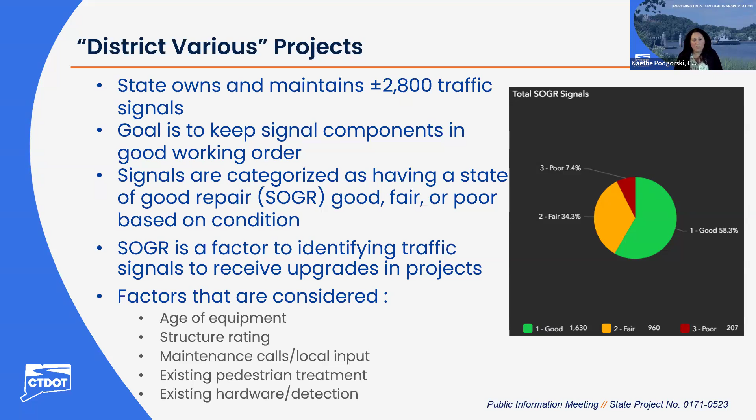So the formal purpose and need for the project is to replace aging signal infrastructure with new signal equipment to achieve a state of good repair.

So some of the improvements that could be expected at these locations are new equipment at the full replacement locations, pedestrian upgrades, potential flashing yellow arrows - that's for permissive left turn movements if there's a dedicated left turn lane. Those have been installed in recent years, and they're getting installed more throughout the state. New vehicle detection, we'll go into that a little bit more. Improved access and potentially amenities at transit stops that are nearby to these intersections, and then illumination of crosswalks and transit stops that are on state roads.

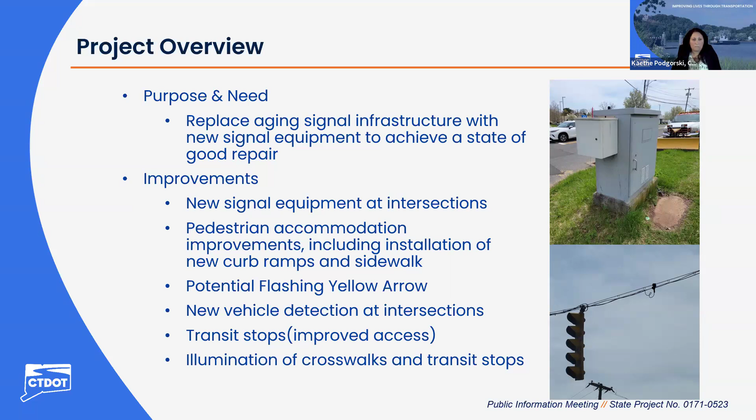So when I talk about bringing traffic signal equipment up to current standards, I wanted to give a little more information on that. We try to use mast arms now as our preferred signal support structure in the state. We have a picture of a typical mast arm used in a project like this on the bottom right. You can see signal heads, the green, yellow, red indications attached to the mast arm, with reflectorized backplates to help with their visibility.

Vehicle detection, I still have another slide to go into more detail about that. Controllers, so each traffic signal has a gray cabinet in its proximity, and when you open it up, you see all of this hardware and wiring in the top right. There's a lot of technology that goes into operating traffic signals and having them communicate with each other, so it can get outdated very quickly. Bringing it up to the latest standard can really help with communications and operation.

And then emergency preemption. That is equipment that can enable safer passage of large emergency response vehicles, such as fire trucks, that have a hard time stopping quickly at a red light because they're so big and heavy. This equipment can identify when these trucks are approaching a traffic signal, and it can hold a green phase so that the vehicle can go through and respond to the emergency a little quicker.

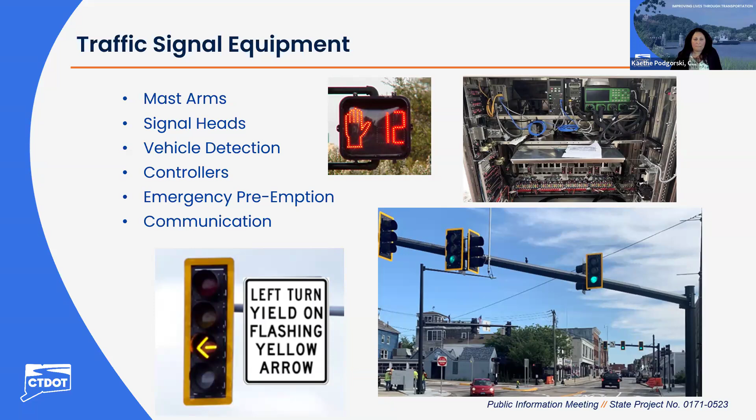So a little bit more information on pedestrian accommodations. Sometimes these are the most noticeable improvements that people see when we come through and do these projects, so I wanted to highlight some of them.

We are trying to make more accommodations for pedestrians and transit users. We're making an effort to install additional crosswalks if there are none, or improve existing crosswalks if they exist already. With that, we're installing new ADA compliant curb ramps, and trying to make sidewalk connections. If there are dead-ended sections of sidewalk, we try to connect them so that pedestrians are able to travel to the intersection and through the intersection a little bit easier.

And then adding pedestrian push signal heads, the walker and the flashing hand, and push buttons for pedestrians to call the phasing for them to cross. What's kind of a new thing in the state is the use of blank out signs, used to draw attention to potential conflicts between right turning vehicles and pedestrians. You can see on this video the loop of how it works and how it cycles through the different messages when peds are walking or stopped. So those are some of the pedestrian improvements that you can expect to see.

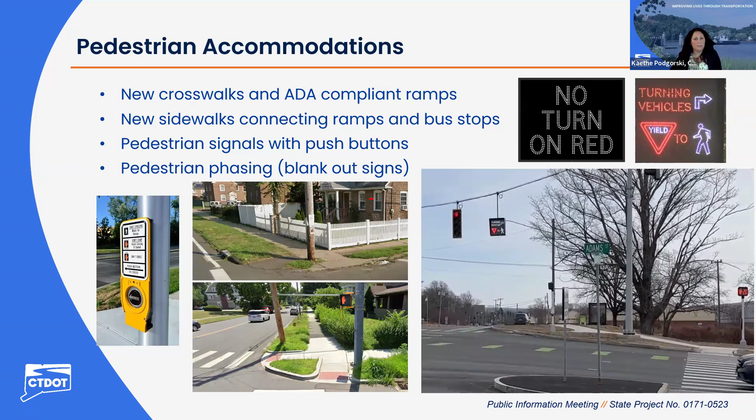And then here's the vehicle detection slide. One of the most typical vehicle detection equipment pieces we use is a 360-degree camera that captures detection zones located right at the stop bar, right at the intersection. You can see this bell camera attached to the mast arm in the photo. You probably see a lot of these around the state, they're very common now. The view from that fisheye camera is shown in the bottom right of the slide, and all the detection zones are where we're interested to know if vehicles are there or not, if they've traveled through or if they're waiting during their red light phase. It helps the signal controller know which phases to call, like a left turn phase could be called if there's a car there, or skipped if there's no car there. It helps the signal operate more efficiently, particularly during the day when there's more traffic, and it also helps it operate more safely at nighttime.

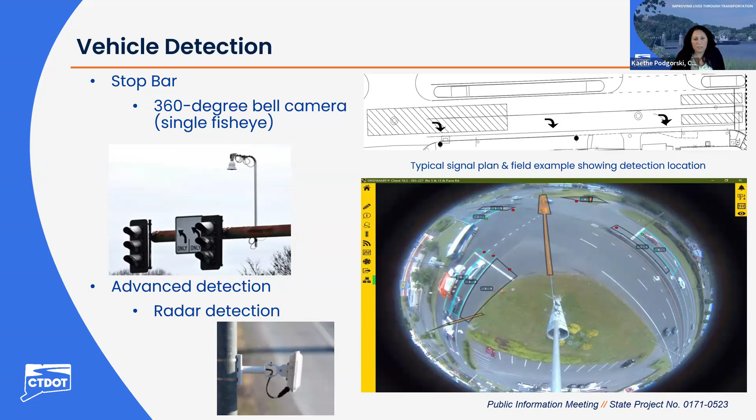The radar detection in the bottom, that white rectangular picture, is used for detection on high-speed approaches as vehicles are approaching the signals. Sometimes it's difficult for drivers to decide whether they should stop as the light is changing from yellow to red, or if they should go through because they're going too quickly to stop. These types of detectors let the controller know there's a vehicle approaching, and they can extend the green phase a little bit if it seems like it's going too fast to stop in time. So you'll see those on high-speed approaches throughout the state.

So that's the overview of the traffic signal equipment and the traffic signal replacement program. Now we're going to get into this specific District 1 project, and I'm going to hand it over to Leo, who will go through all of the individual locations.

Thank you, Kaethe. So as mentioned, my name is Leo Gamez. I am a traffic engineer at CTDOT, and I'll be going through first the various full replacement locations and then the partial replacement locations.

So first here in Enfield, we have one full replacement location. It's on US Route 5, Enfield Street at Parker Street. I just want to introduce here the legend that will be remaining constant throughout all of the images you see of the plans. You'll see that we'll have these blue shapes that'll be proposed easements.

Malcolm Thomas will be talking a little bit more about easements and rights of way later on in this presentation. The green shapes will be new ramps or sidewalks. As part of this project, we're doing various pedestrian improvements, so that'll be in green. Crosswalks will be in purple, shown with little dot icons. Mast arm signal supports, where the foundation is, will be a square instead of a circle, in orange. Signal heads will be a triangle attached to this mast arm.

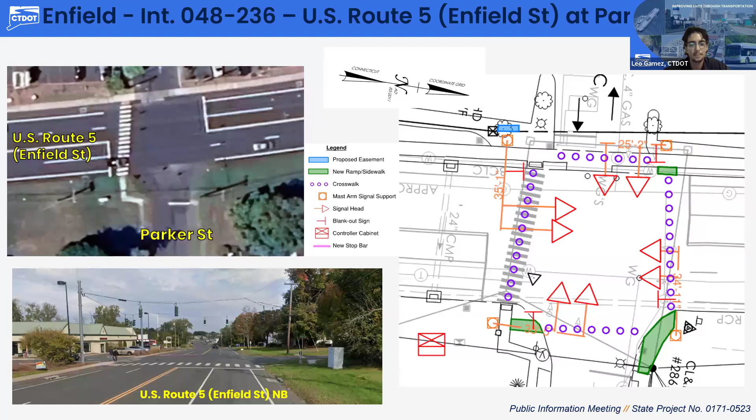So in Hartford, we have 6 locations that are receiving full replacement upgrades along this corridor. So starting here on Route 187, which is Blue Hills Avenue at Westbourne Parkway.

Starting at the southwest corner, we have a 35-foot mast arm. Again, we'll be obtaining some easements here for installation.

On the northwest corner, we have a 35-foot mast arm as well. On the northeast corner, we have a 30-foot mast arm. And on the southeast corner, we have a 30-foot mast arm. We'll be maintaining the 4 crosswalks that are present here at this intersection, as well as doing some upgrades to the sidewalk ramps.

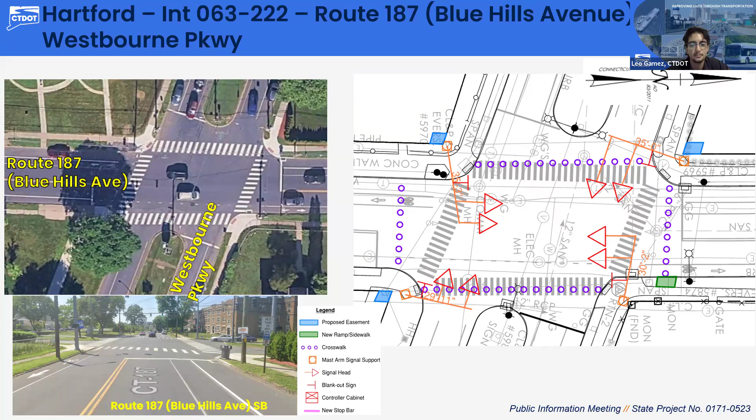So moving north along this corridor here on Blue Hills Avenue, this is Route 187 at Plainfield Street. At this location, we're proposing a singular mast arm that's going to be located on the southwest corner. This is going to be a 65-foot mast arm. It's going to accommodate indications for all approaches.

Also at this intersection, we'll be maintaining pedestrian connectivity across all of the legs of the intersection, as well as moving back some of these stop bars, as you can see, on the north, west, and east approaches in order to better accommodate that pedestrian surface.

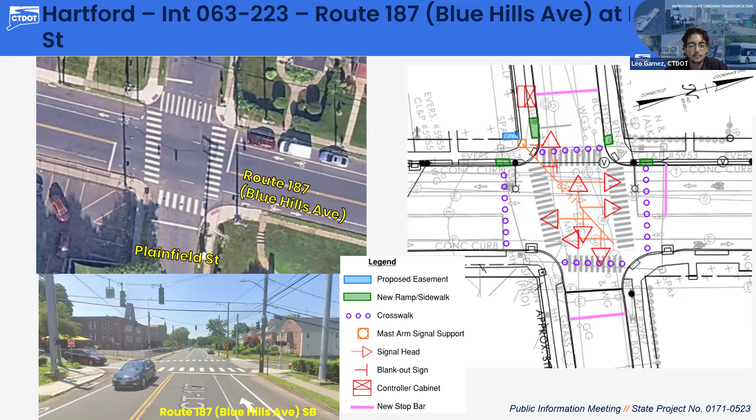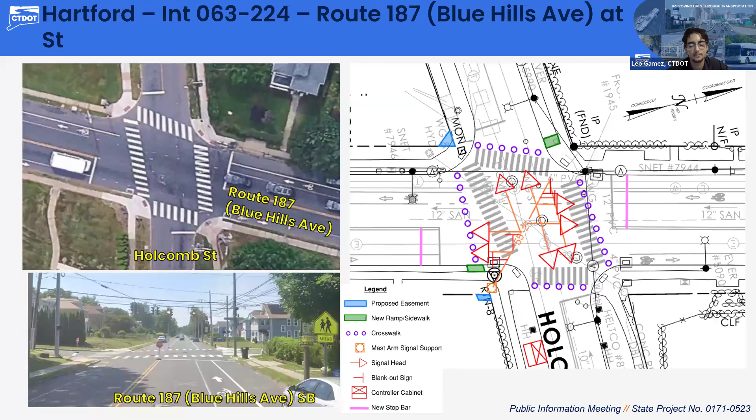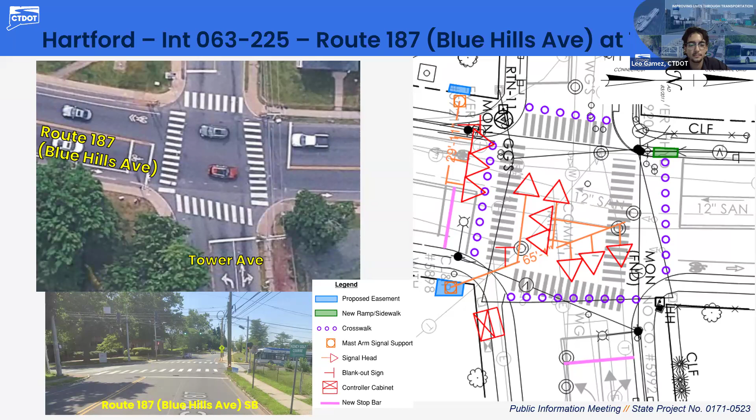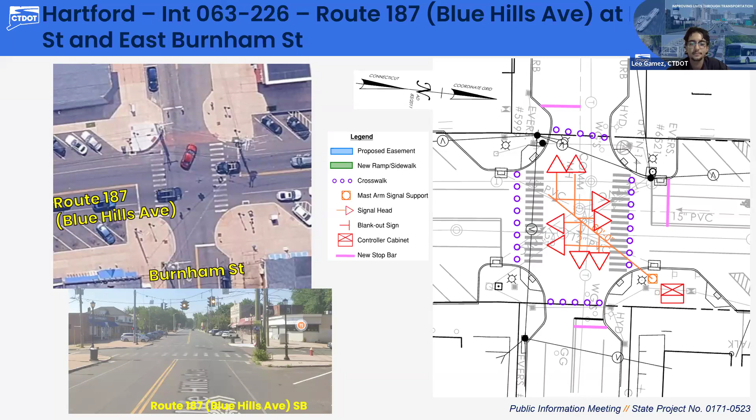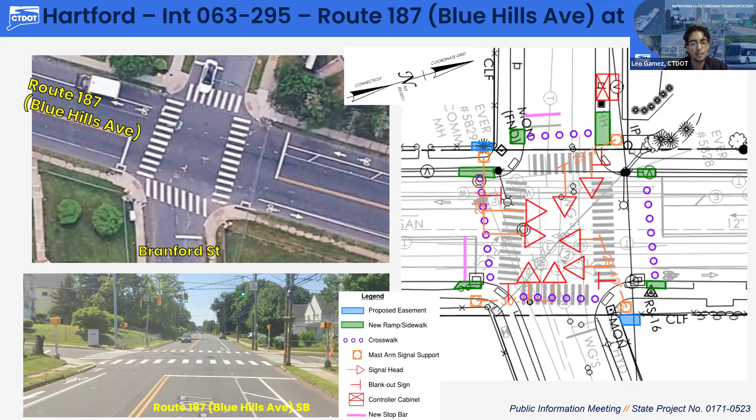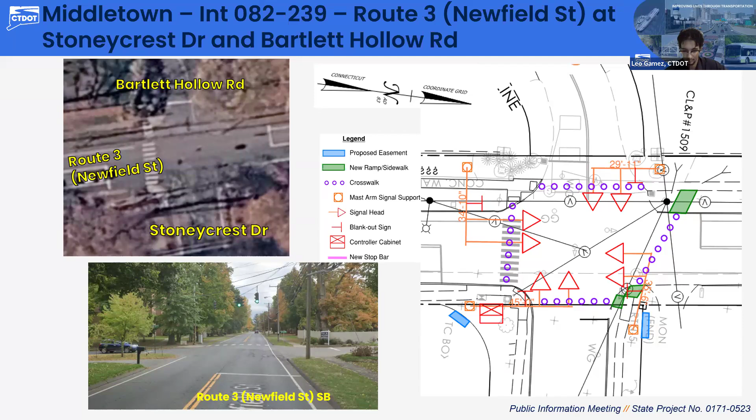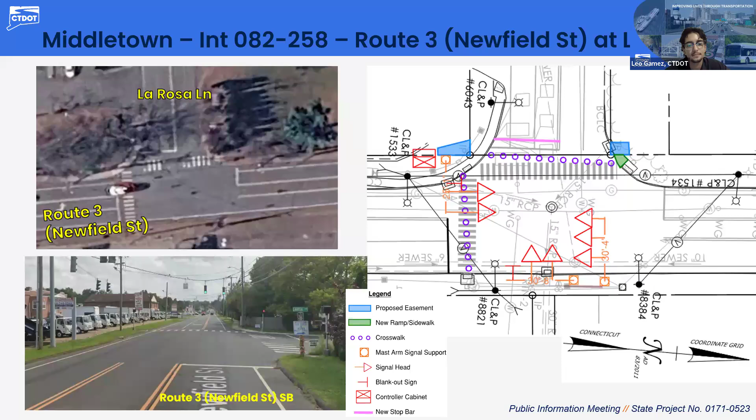So now we'll be moving on to partial replacements. Unlike the previous full replacement locations, we're not proposing any new mast arms or overhead equipment for the traffic signal. Instead, these locations will largely be comprised of pedestrian, intersection compatibility, and vehicular detection upgrades.

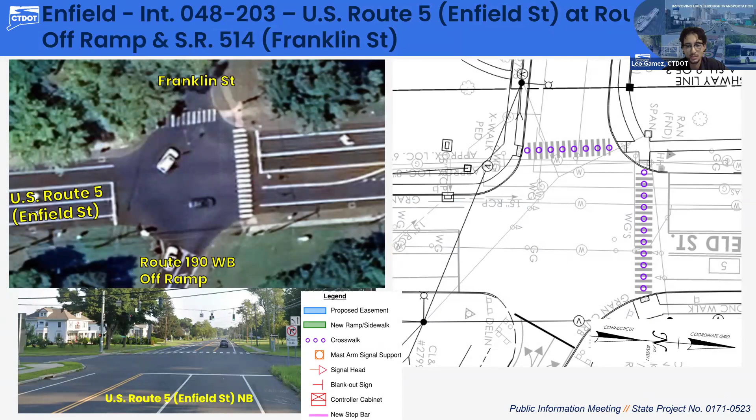Again in Enfield, this is Enfield Street at Frew Terrace, which is State Route 515, and the on-ramp to Route 190 eastbound. At this location, there's currently one marked crossing, so to facilitate pedestrian access, we'll be marking out another crosswalk, providing some sidewalk ramps, and adjusting a stop bar to facilitate that pedestrian crossing.

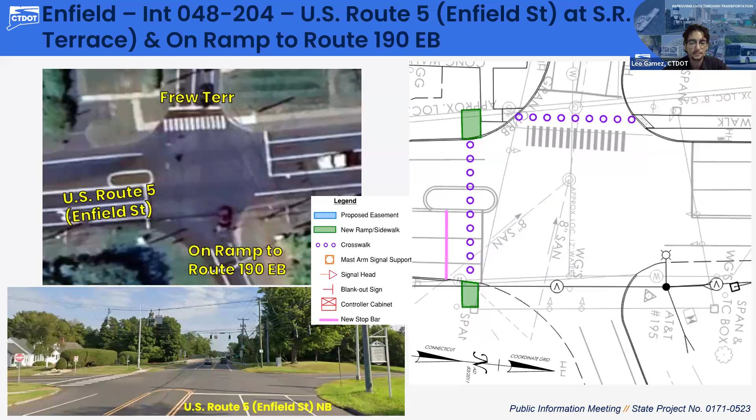This is US Route 5, Enfield Street at High Street. At this location, we're maintaining an existing marked crosswalk across High Street, and we'll also be adding a marked crosswalk across Route 5 and providing a pedestrian landing.

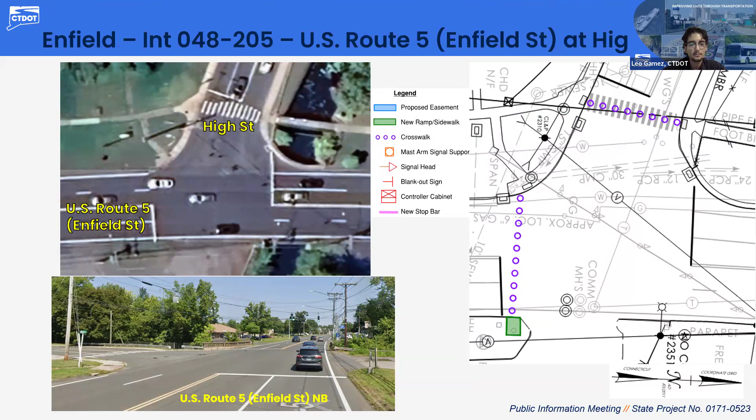This is US Route 5, Enfield Street at Brainerd Road and Sunset Drive. There's an existing marked crosswalk, so we're maintaining that as well as providing some sidewalk access to an additional crosswalk that exists. Instead of having that crossing removed from the intersection, we'll be keeping it along the main road to provide greater pedestrian access and visibility.

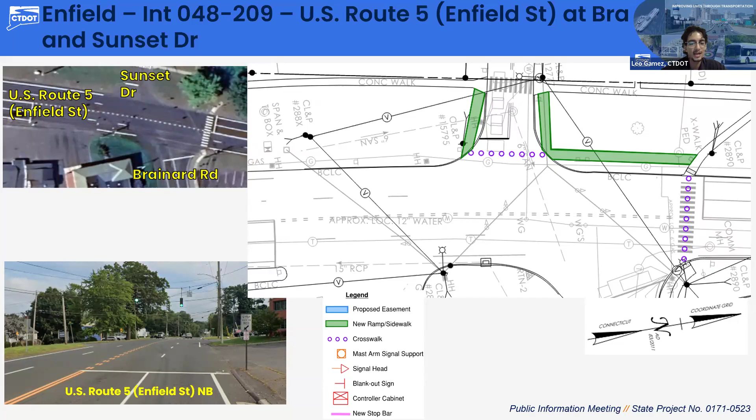Still in Enfield, this is US Route 5, Enfield Street at the I-91 northbound ramps, Bright Meadow Boulevard, and a private driveway. At this location we'll just be doing some pedestrian upgrades. There's an existing marked pedestrian crossing, and we'll be doing some sidewalk ramp improvements as well as providing a marked crossing to connect some sidewalk.

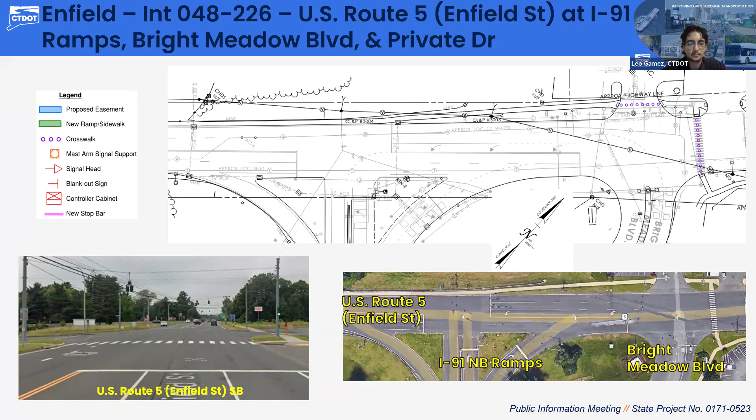Also in Enfield, this is US Route 5, Enfield Street at Montano Road and a Dunkin' Donuts driveway. We're maintaining this existing marked crosswalk and making improvements to the sidewalk ramps, as well as providing marked crossings where pedestrians would be likely to cross some of these driveways.

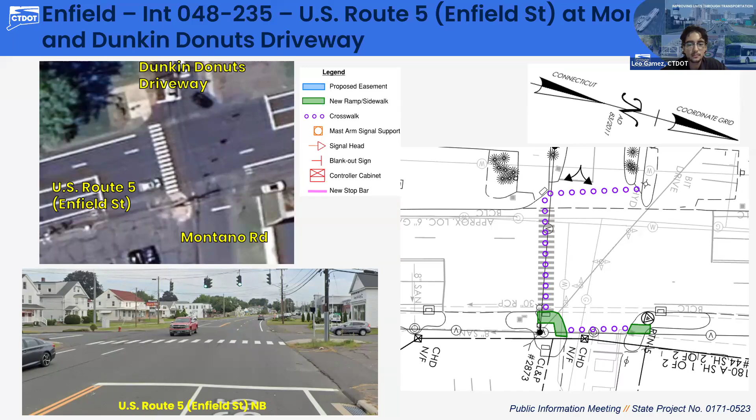This is US Route 5, Enfield Street at the I-91 southbound ramps. At this location, we're marking out a crossing on the northbound approach, as well as providing sidewalks to connect to an existing sidewalk that's a bit removed from where people might be likely to cross, and maintaining an existing marked crosswalk across these sidewalks on the ramp side.

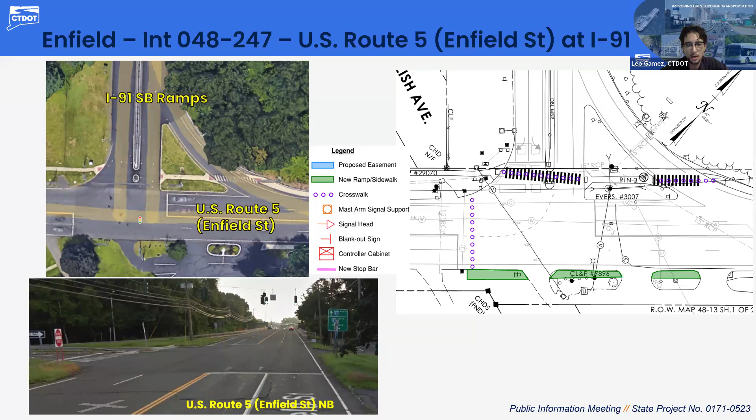So we're back in Middletown for a partial replacement. This is Route 3, Newfield Street at Westfield Street. This location currently has three existing marked crosswalks, so we'll just be maintaining those and doing some improvements to the sidewalk ramps. We'll be obtaining a couple easements to better structure these sidewalk ramps.

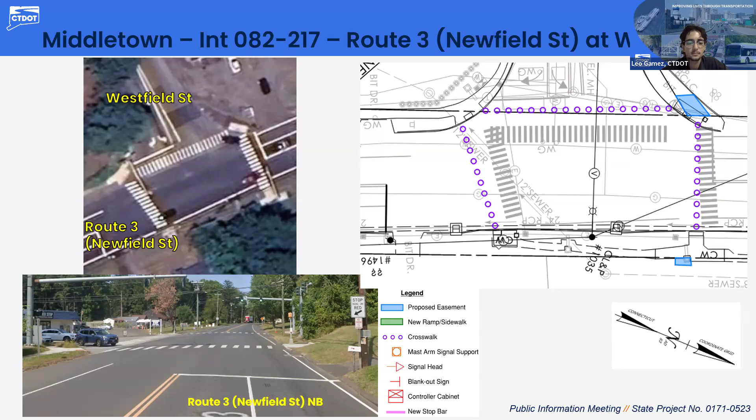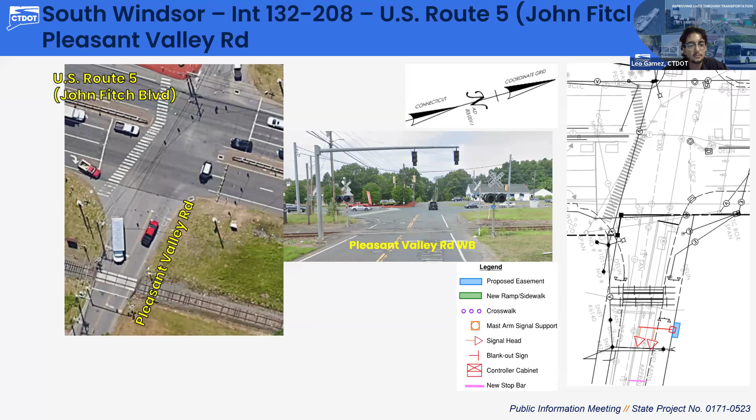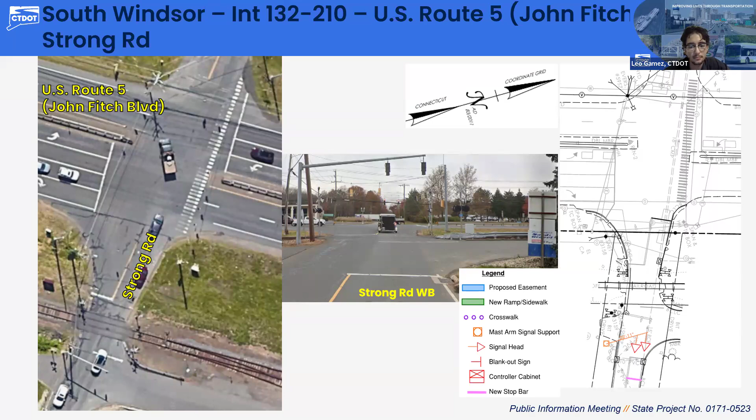And that's all of the details about the full and partial replacements. So I'm going to hand it back to Katie.

Great, thank you Leo. I'm just going to go over a couple of the coordination items that we have done and that we will be doing throughout the rest of the design phase of this project. We did notify the municipalities of all the locations and the scoping for all the different locations back in July of 2025, and we will be contacting them again shortly. The LTAs, as I mentioned before, we will be coordinating with throughout the remainder of the design. We'll be sending emails to them shortly to discuss more specifics about these designs now that we have the concepts.

Another of our next steps is to begin our outreach and coordination with utility companies. There are potential conflicts both underground and overhead, so we need to coordinate with these utility owners to either avoid or resolve conflicts as necessary. We do that through a series of virtual and field meetings. And this public meeting is part of our coordination and outreach as well, which is occurring right now.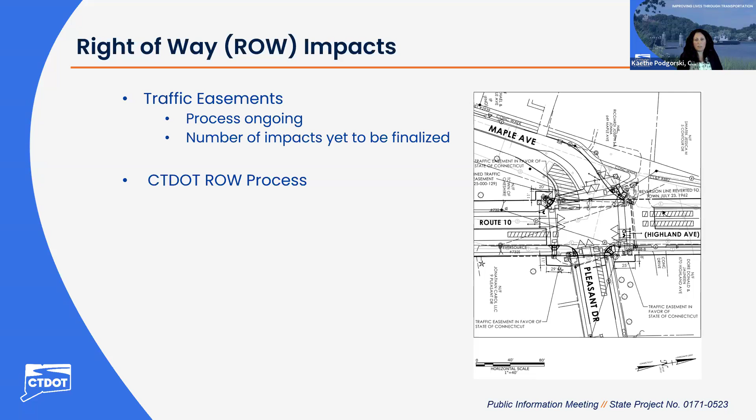Thank you, Kaethe. Good evening. As mentioned, I'm Malcolm Thomas, an assistant project coordinator with the department's rights-of-way division. Our office is responsible for the acquisition of necessary property and property rights for transportation projects throughout the state.

Any property rights will be acquired in accordance with Connecticut General Statute sections 13A-73 and 13A-98E, as well as the Uniform Act. It's important to note that the state will only acquire property rights that are deemed necessary for the project.

This will be used to establish an offer of just compensation. The offer will be sent to the property owner in writing, and a right-of-way agent will be available to meet with impacted property owners to explain the project, go over the impacts to their property, and explain the state's offer. Property owners will typically have 30 days to consider the state's offer and enter into negotiations.

Once an agreement is reached, the department will prepare all necessary paperwork to record the conveyance documents and property maps on the town's land records.